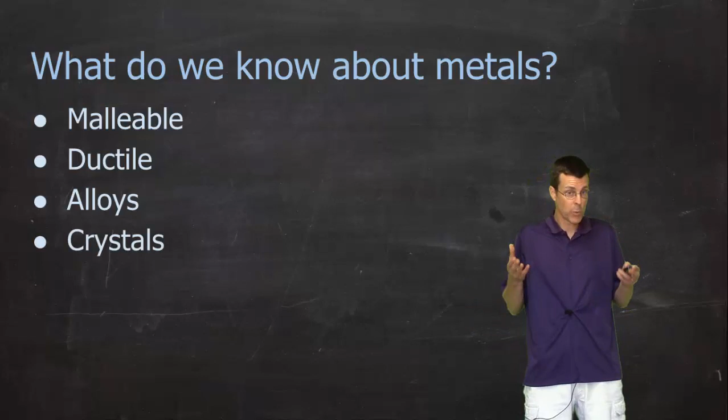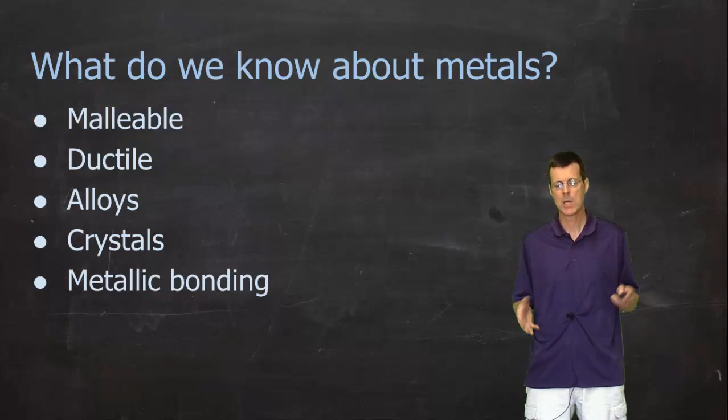But one of the big things we talked about last time was that metals are crystals. They have a very regular shape within their small structure. And then they also undergo something called metallic bonding. It's a type of chemical bond, but you've got a bunch of atoms in there that hold their electrons fairly loosely, and those electrons can move around from one atom to the other, which is what makes metals good conductors of heat and electricity.

And when we talk about metals being crystals, I showed you this series of pictures last time as well. And the whole point was, especially within this last one here, as metals are formed crystals, you get these areas of regular growth or regular structure this way, and then another area where it's also a regular structure, but it's a different orientation. And that's where we have these boundaries, and these are called grain boundaries because the individual sections are called grains. And people will talk about the grain growth or grain boundaries, and those boundaries will introduce properties.

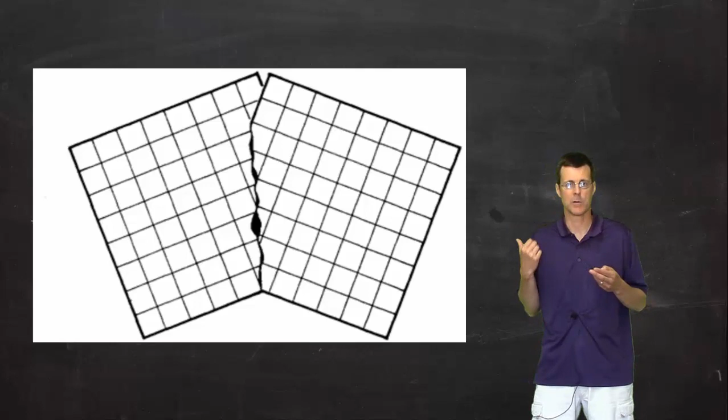Now sometimes we like those properties, sometimes we don't like those properties. It depends on what we're trying to use the metal for. It depends on what we want that material to be. So if you start looking at those grain boundaries in slightly different ways, and this is maybe a better picture, or this one's three-dimensional, you can see that structure where that grain boundary is, it might be a weak point, but if you have enough of them, perhaps it ends up making the metal stronger. So it all depends on the metal and what we're going to use it for and so on.

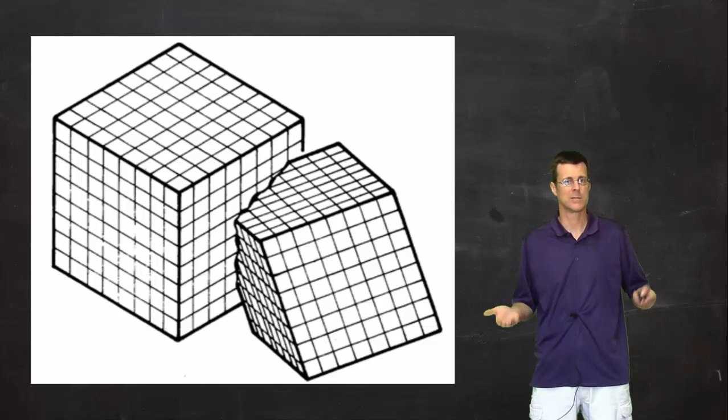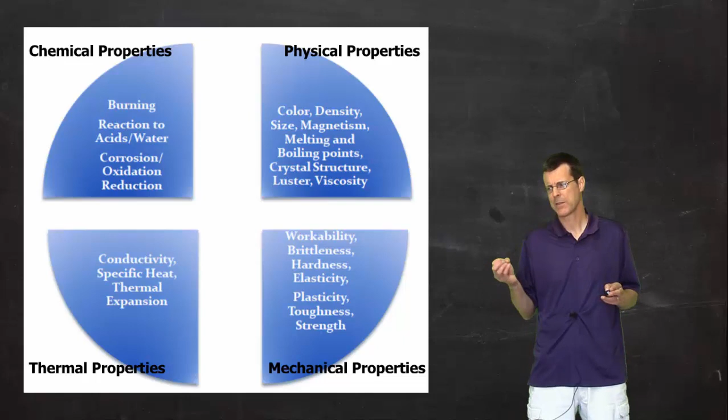And when we start getting in class and doing stuff like this, we're going to manipulate some of these things with heating and cooling and slow and fast heating and cooling and see what we can do with that. Showed you this picture as well last time when we were talking materials in general. And at the time we focused on the mechanical properties just sort of as an introduction.

But if we look at things like here, so we have workability. Well, that's ductile and malleable joined together. Can I work that metal? But if that metal is workable, is it strong? Is it hard? Is it brittle? And any one of these properties, brittleness sounds like it's a bad thing, but it's not necessarily bad. It depends on what we're trying to do with it, what we want that material to be. Do we want it to be tough?

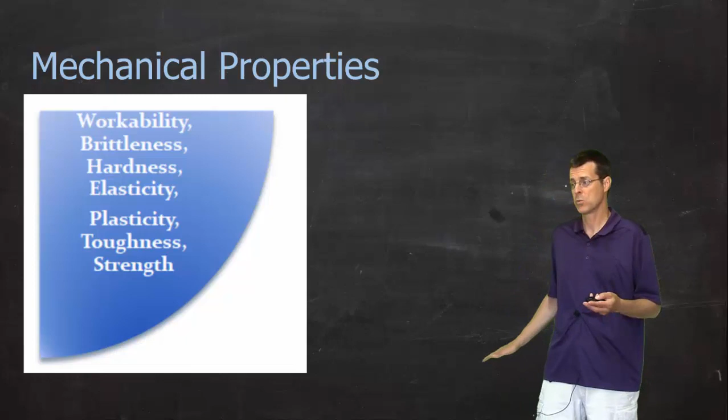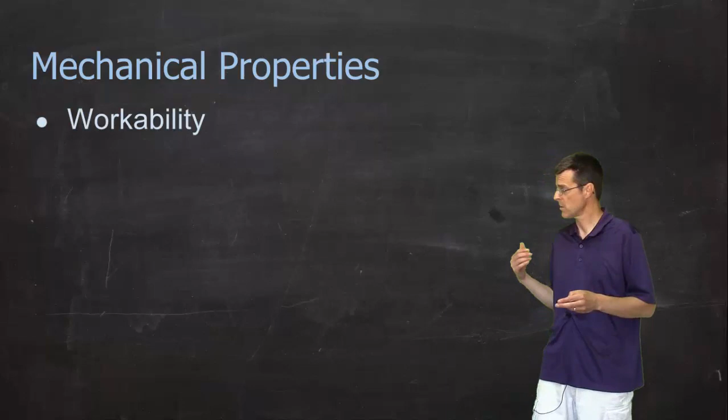So we're going to spend a little bit of time talking about what these properties mean, because they are important for metals. So when you talk about mechanical properties, as I mentioned, workability is whether it's malleable and ductile. Brittleness is how easy it is to break when a stress is applied. So stress is some sort of force applied on that material.

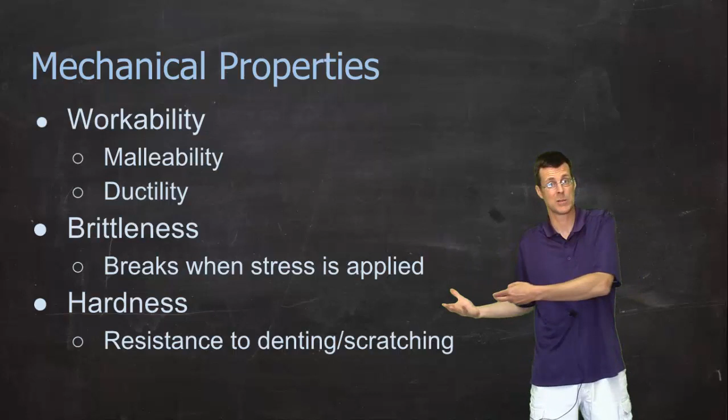Hardness is will it dent or scratch. So for example, if you have a hammer or something like that, you want it to be hard, because if you're hammering and your hammer starts to dent, not ideal, and you don't want it to be brittle. But certain things, maybe you do want brittleness if it's a safety feature. So if there's something that when stress is applied you want to break so that something more important doesn't break, brittleness would be a good thing.

If we keep going, there's elasticity. If you bend something, does it bend back? Plasticity is if you bend it, it doesn't bend back, or if you apply a stress, it won't bounce back. So plastic and elastic are kind of separate things. So you can't have a plastic elastic. Toughness is the amount of energy required before it will break. Certain things, not very tough, other things are very tough.

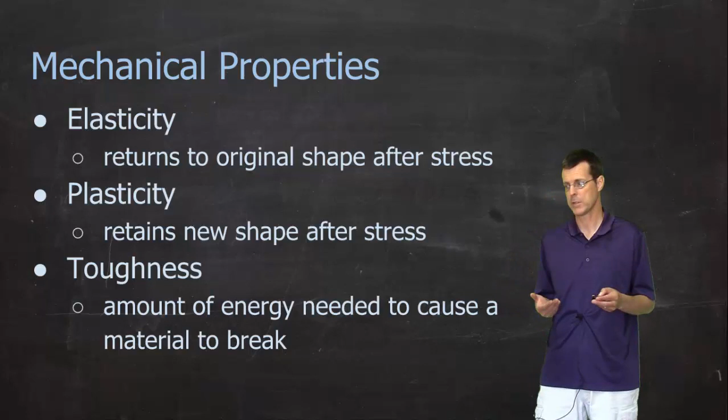And then there's strength, and that's usually determined by what's called a tensile test, and it gets perhaps less intuitive, but at the point where you can bend it and it stops bending back. So bending it comes back, that's strong, but if you bend it, at what point will it not come back? So that's kind of what we're after there. And then there's the ultimate: how much does it take to break it?

Every material has that. Whether or not you're going to find that in day-to-day use, well, it depends on what you're using. If you're hammering nails, you probably aren't going to break your hammer. You probably aren't going to break your nail. But if you are twisting bolts, maybe you will break a bolt off from time to time.

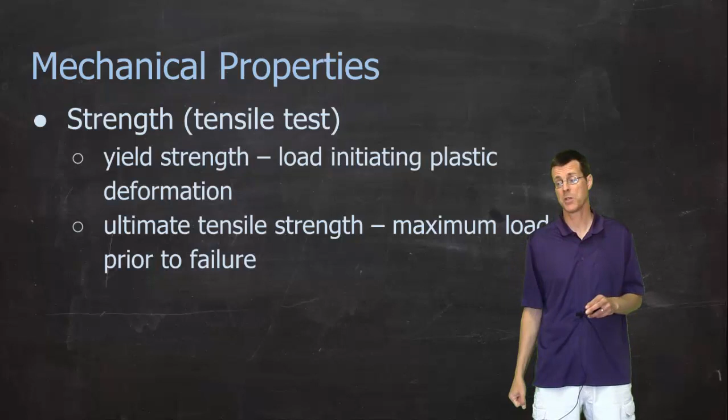This is more of a pictorial representation of some of those mechanical properties, and there's a couple of others pushed in, but just sort of what it means when you are applying tensile strength, you're stretching it, when you're compressing it, and so on. If you want to pause and look at those a little bit more, that's great. We're going to move on.

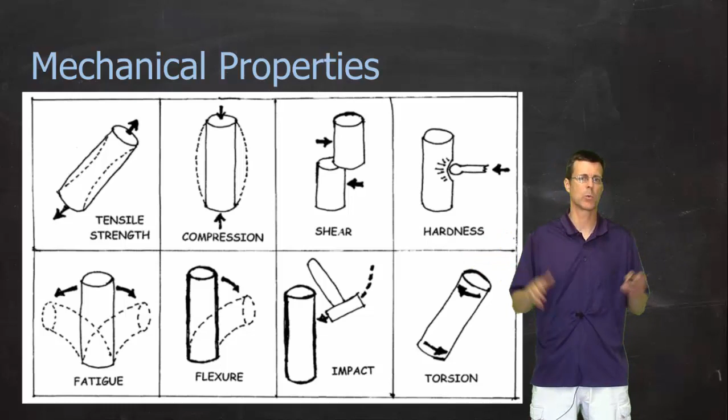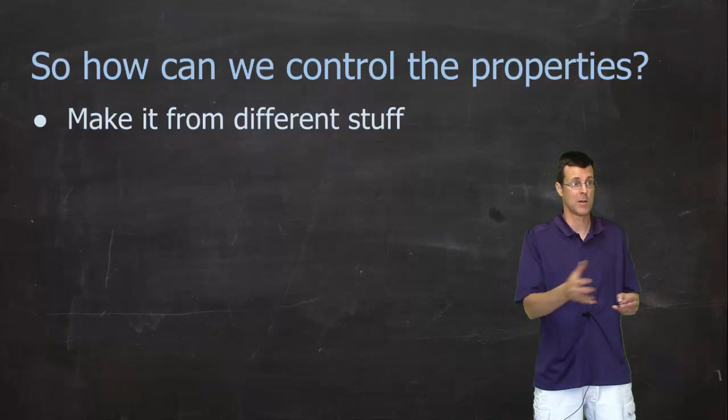Okay, there are times where we want to manipulate the properties, where we want to make something more tough, or we want to make something harder or less brittle. So that means we're going to be controlling those properties. One of the options is to make it from different stuff. So if this metal is not very strong, or if this metal is too brittle, maybe don't use it. You can also add different stuff. So when we're talking about metals, we can now talk about alloys. So there's steel, which rusts, and then there's stainless steel, which doesn't. Stainless steel is an alloy involving steel and some other things, chromium and nickel, for example.

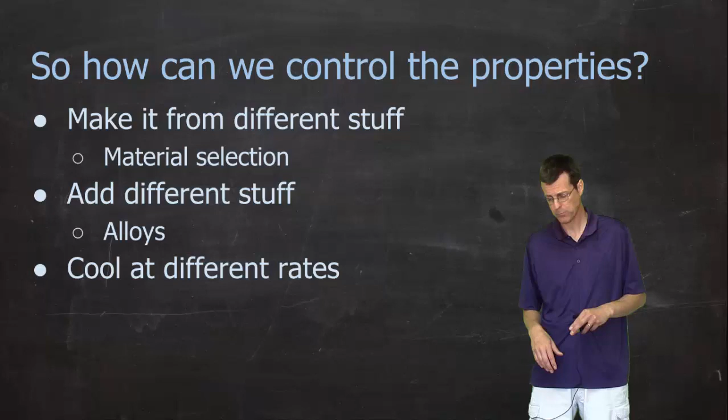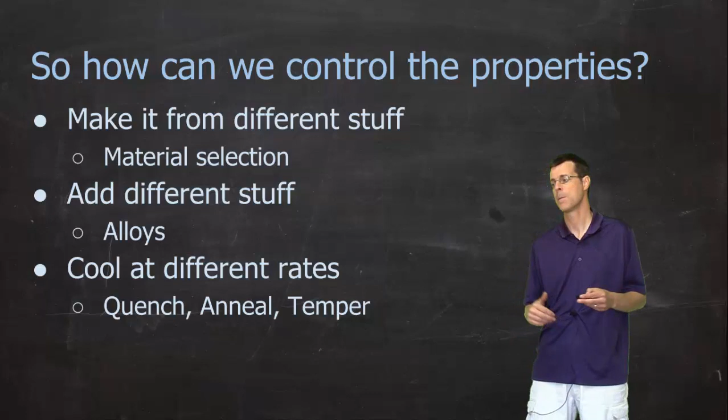You can also cool it at different rates. Remember back to that picture where there was small grains on the outside, longer grains on the inside, and I said it was from rapid cooling versus slower cooling. Well, if you slowly cool something, larger grains. Rapidly cool it, smaller grains. We're going to talk about these words in class, and we're going to try and do something with those, where there's something called a quench, and that's where you take something hot and you cool it down quickly. Anneal, where you heat it slowly and let it cool slowly, and then temper, and we'll talk about that in more detail when we get there.

We can also do something to disrupt the crystal structure. There's something called work harden, and we're going to see what that means. But if you think about a blacksmith hammering away on a horseshoe or something like that, when that horseshoe is still pretty hot, he's going to hammer away for a while, and then he's going to heat it up a little bit more. What happens is something called work hardening. So as you're working something, it'll get harder because you're crunching the grains and those grain boundaries around, and eventually you're going to run out of space for moving things around.

And then cold work is, well, as it says, we're trying to work on something when it's cold, where you haven't heated it up. So we're going to spend some time looking at not all of those things probably, but some of those things as they apply to metals, how it changes the properties of metals. But we also want to be thinking about other stuff.

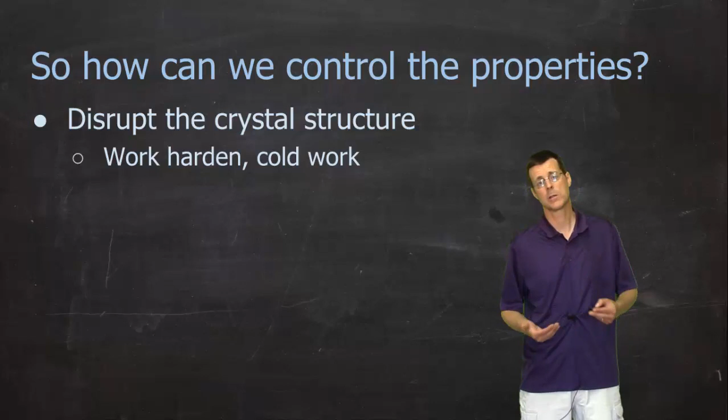So anyhow, I'm starting to jumble my words a little bit. We'll talk about it in class. We'll do some stuff. It may take us a bit of time to get through it all, but hopefully we have a better understanding of metals and what they can do when we're done.